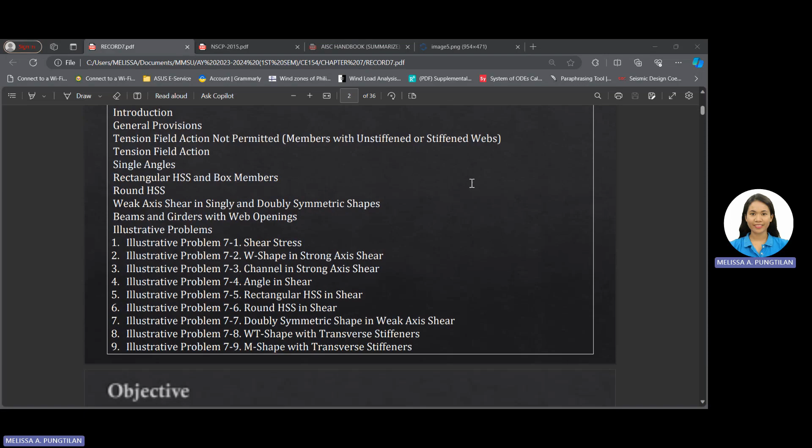So the outline of our topic for today, let's start with the introduction. Here we will be refreshing our knowledge on shear stresses and shear forces, applying what we learned during Mechanics 104 to this chapter. Then we have the general provisions, specifically Section 507 of the NSCP, which is solely for the design of members for shear. We'll also discuss tension field action, what are the meanings of stiffened and unstiffened webs, and then single angles, rectangular HSS, and so on. As we go through our examples, we'll learn what these terms mean and their applications. We also have 9 examples, but unlike our previous topics on compression and flexure, these examples are not too long.

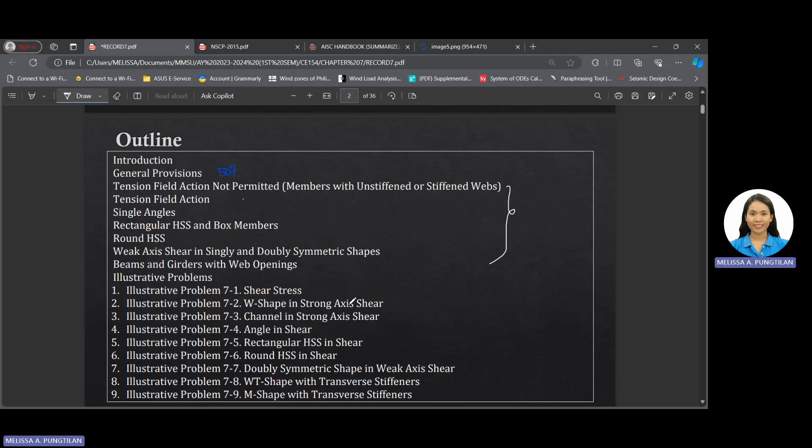So our objective for today: you will be able to identify the shear forces and shear stresses imposed on structural members. This will be mostly a review since we already covered this during Mechanics 104. We will also identify the difference between the strong and weak axis, differentiate doubly and singly symmetric shapes, design and analyze structural members for shear, and calculate the shear strength of different structural shapes. Okay, so let's start.

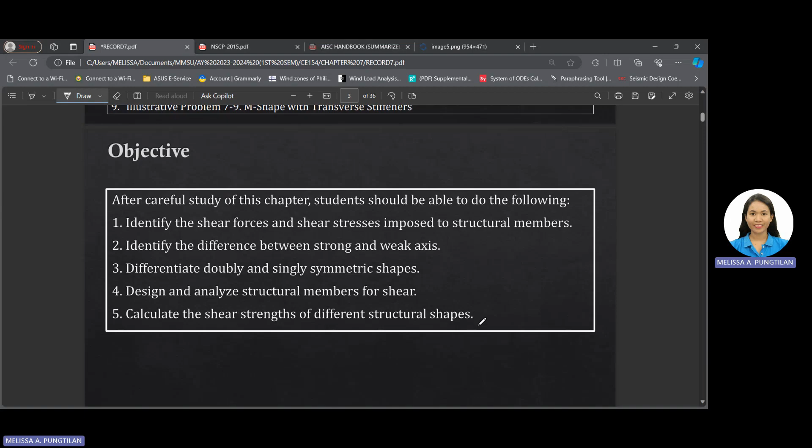This section addresses webs of singly or doubly symmetric members subject to shear in the plane of the web, single angles and HSS subject to shear, and shear in the weak direction of singly or doubly symmetric shapes. These are the different scenarios we'll encounter in our examples. We will focus on the webs for I-beams, for doubly and singly symmetric members, and for single angles and HSS, our approach will be different. All of this follows the provisions specified in Section 507 of our NSCP, which gives us our guiding principles and specifications, just like the other topics.

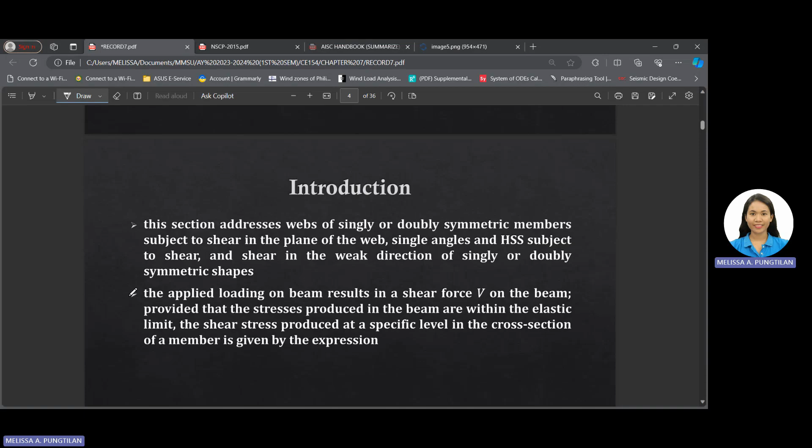The applied loading on a beam results in a shear force V on the beam, provided that the stresses produced in the beam are within the elastic limit. The shear stress produced at a specific level in the cross-section of a member is given by an expression to be discussed later. As you may recall from Mechanics 104, we computed the shear forces of a specific structural element. There are two ways to get the shear force: the most common is by drawing the shear diagram, and the other way is by using the method of sections.

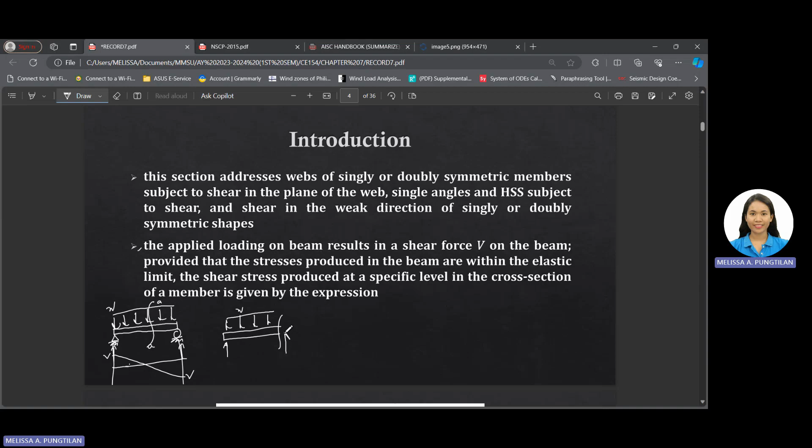For example, here we have a simply supported beam loaded with a uniformly distributed load. What we do is get the reactions, then draw the shear diagram to get the shearing forces at a specific area or location. Or we can use the method of sections: when we cut a beam, we have the reaction and the load intensity, and when we cut, we can see the shear force at that point, which we can compute. This is usually denoted as V, our shear force. So the shear force V depends on the applied load.

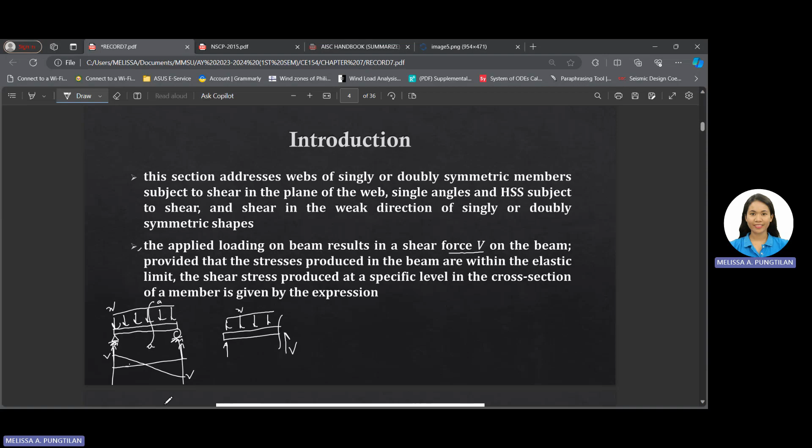Our shear stress can be computed by this formula, where the shearing stress FV is equal to VQ over IB. This was already introduced during Mechanics 104, where V is the shearing force, Q is the statical moment of area, divided by the moment of inertia of the section, multiplied by the width. So this is our general formula for shearing stress: FV equals VQ over IB. What we do here is first identify the shearing force, so how do we compute the shear force?

Of course, by having the shear diagram or the method of section.

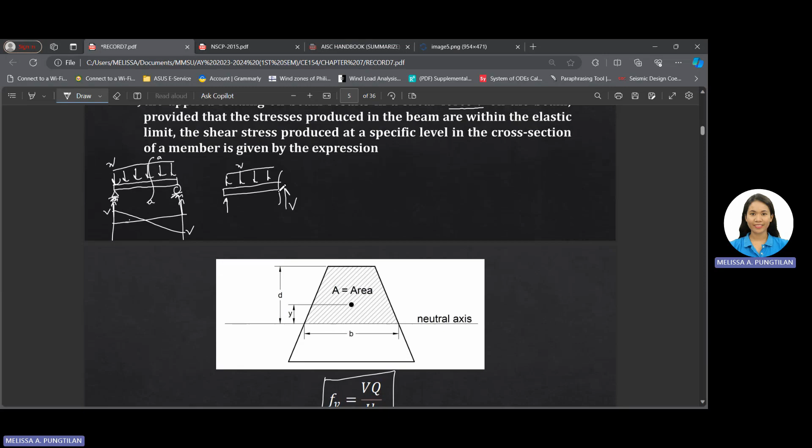Next, our Q, the statical moment of area, is just Q equals A multiplied by the distance. For example, this is our section, this is the neutral axis, already located. What we are getting here is we identify a specific area, let's say the area above the neutral axis. So we determine the area multiplied by Y. That Y is just the distance of the centroid of the shaded area going to the neutral axis. That's why we have our formula for statical moment of area multiplied by Y, where Y is the distance from the centroid of the shaded area to the neutral axis.

Then D, distance of the topmost fiber from the neutral axis, distance of the centroid of the shaded area from the neutral axis, moment of inertia, and the width of the section at the level considered. So again, this is the general formula for the shearing stress. And if you're still familiar, we also have one for rectangular sections: 3 all over 2 multiplied by the shear force divided by area. This formula is derived from VQ over IB, but this one is for rectangular sections only. So let's go back to our formula, VQ over IB. Where did that come from? It came from the concept on which...

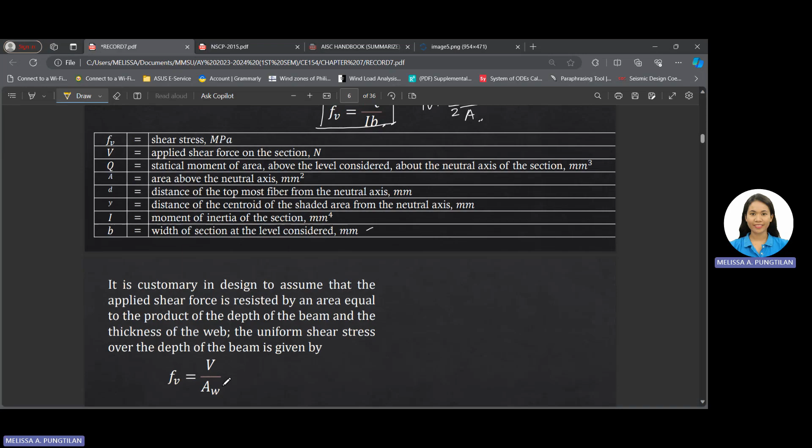V divided by the area of the web. Itong formula na to. So, FV is equal to V all over the area of the web.

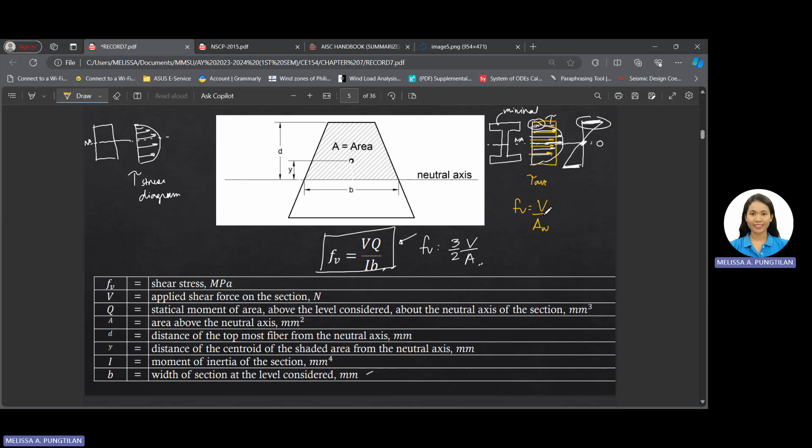Okay. But here, ang i-consider natin na area of the web is the depth multiplied by the thickness of the web. So, ibig sabihin natin sa depth, ito yun. Ito yung i-consider natin, depth. Tapos, yung thickness of the web.

Okay. Ma'am, area of the web lang naman yung i-consider. Bakit natin i-consider yung overall depth? Bakit kailangan pa natin i-consider yung flange? Ang sabi dito, area of the web. Because we are on the average. Shearing average yung kinukuha natin dito. So, kailangan pa rin natin i-consider kung ano man yung meron dito sa flange. Kung ano yung stress na nandito sa flange.

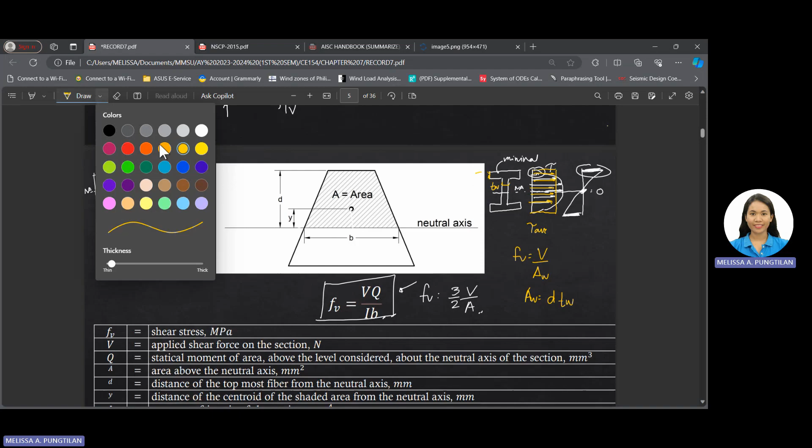Kaya imbis na H, di ba H yung ginagamit natin dito sa web. Pag meron tayong saan na yan? Diba, if we are talking about the web, ang kino-consider natin dyan is the H, or sa AISC natin, it is the T. Pero dito, ang i-consider natin is the depth of the whole section, because we are talking about the average.

Okay? We are talking about the average. Even if small lang stress nandito sa flange, i-consider pa rin natin kasi nga, we are talking about the average. Therefore, in having the average shear stress, we will be using V all over the area of the web, on which the area of the web is equal to the depth of the section multiplied by the thickness of the web. Okay?

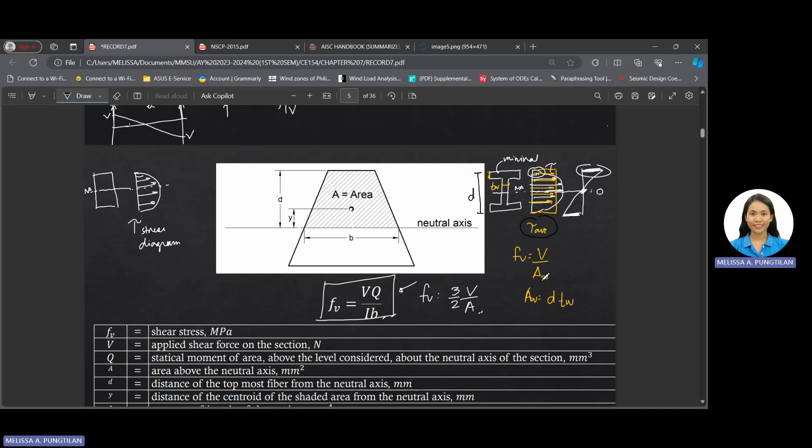Yan. So, dito nanggaling yung ating formula for the shear stress.

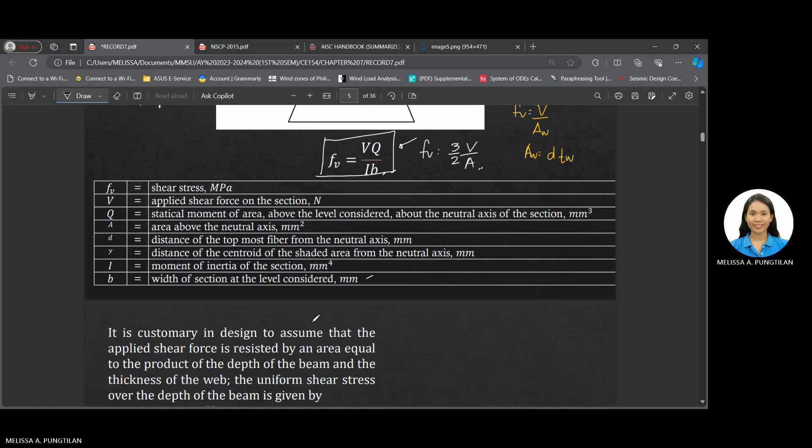So later on, makaka-encounter tayo ng mga terminologies just like transverse stiffeners, tension field action, pero di-discuss natin yan mamaya. Okay? That's why meron akong mga illustration dito.

Okay, so puntahan naman natin ngayon yung, bago tayo mag-proceed sa examples natin, let's open our NSCP and proceed to section 507 for the provisions and specifications for the design of members for shear. Okay?

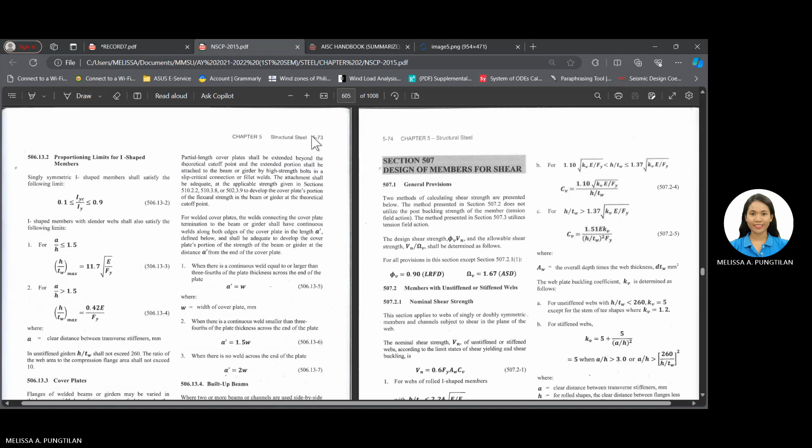So, discuss lang natin saglit. So, for our general provisions, two methods of calculating shear strength are presented below. The method presented in section 507.2 does not utilize the post-buckling strength of the member or the tension field action, while the method presented in 507.3 utilizes what we call the tension field action.

So the design shear strength, okay, is equal to phi v Vn, and the allowable shear strength is equal to Vn divided by the omega V. So ito yung gagamitin natin for the LRFD, the design shear strength, phi v Vn, and then sa ASD, we will be using Vn divided by the omega, on which yung ating phi, again, is equal to 0.9, and then the omega is, or the safety factor is equal to 1.67 for ASD. Okay?

So, dalawa yung magiging computations natin dito, or dalawa yung sections natin dito sa 507. We have the members with unstiffened or stiffened webs, and then for 507.3, dito naman natin makikita yung tinatawag nating tension field action. Okay, so ano yung tinatawag natin na unstiffened and stiffened elements, and then yung transverse stiffeners tsaka tension field action. Okay, so we have here a I-beam.

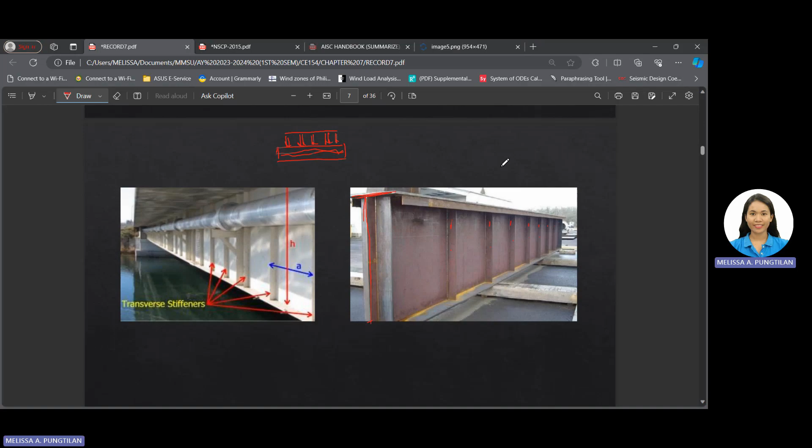So the tension field that we call, let's get a drawing here. This is our I-beam, side view. Let me sketch this example. So this is the flange, then this is the stiffener. Okay, stiffener, then the flange. Of course, here is the web, right? Web. Then the stiffener, then flange.

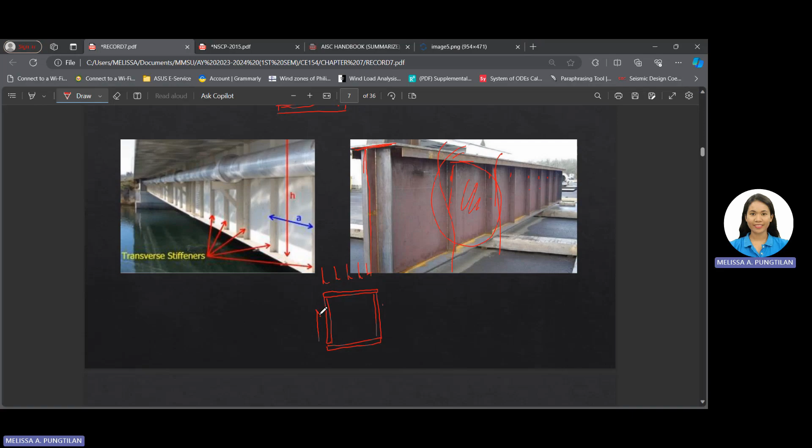So when we apply a loading, right? We apply a loading. So what resists it? A certain shearing force, right? Shearing force. Of course, it has a partner, right? So if that's upward, of course we have a shearing force downward to create a sliding effect. Then there's a complementary part here.

So that's the action or distribution of our shearing forces if we have a stiffener then flange. So what happens here is we get a resultant force in this part, which we call tension. There will be tension there, then here we get compression. So there is compression and then tension on each side of our section. So what happens to the web if a stiffener is provided?

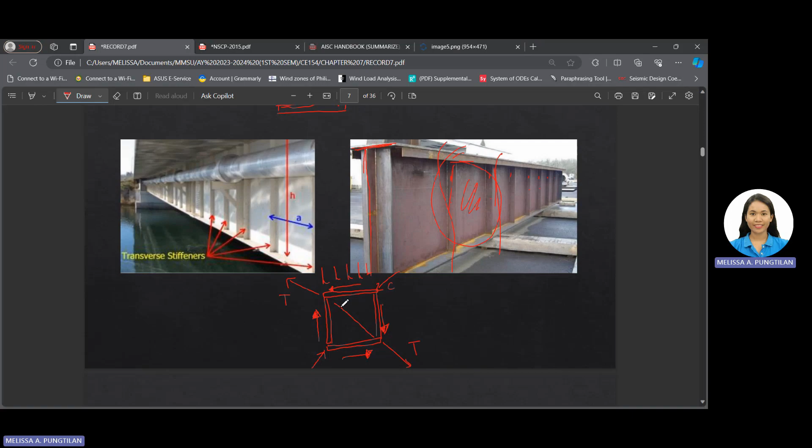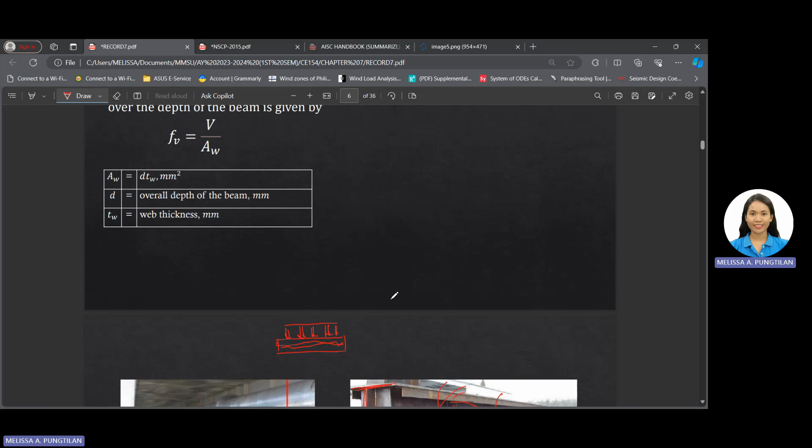So we get what we call panel shear. This is now called panel shear, if we provide a stiffener to our webs. So the tension field action that we call occurs here. There's tension on the panel shear. So the tension field action looks like this. It happens in our web if we provide what we call transverse stiffeners.

These are our stiffeners, and this is the web. So this is the section I drew earlier. So what was done here? This is a testing of material. They applied a load on top. They placed a load. Then, through the use of stiffeners, they developed what is called tension field action. So again, the tension field action happens in our web if we provide transverse stiffeners. So our shear stress is redistributed here in what we call panel shear. This is panel shear, so that's tension field action.

And again, the tension field action only happens if our web has stiffeners on all four sides. So this is our web, right? It has stiffeners. What are its stiffeners? The plate stiffeners we installed, then the flange. The flange also serves as a stiffener for our web. So tension field action only occurs if the web is stiffened on its four parts or sides. This is our web, stiffened with transverse stiffeners, and of course on top the flange, and also at the bottom, flange. So that's what we call tension field action.

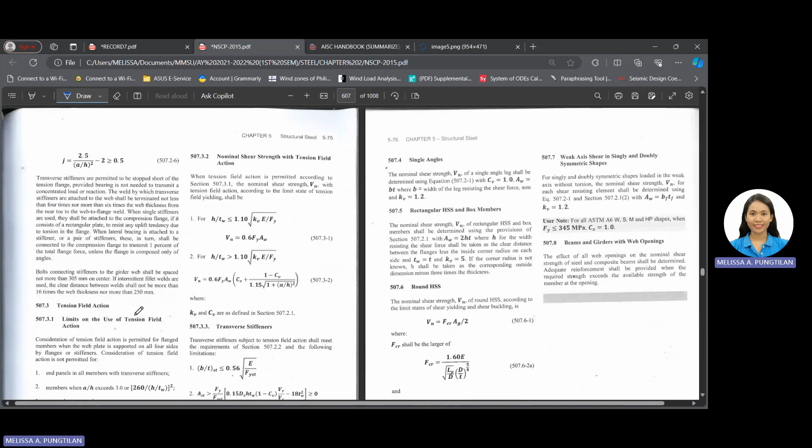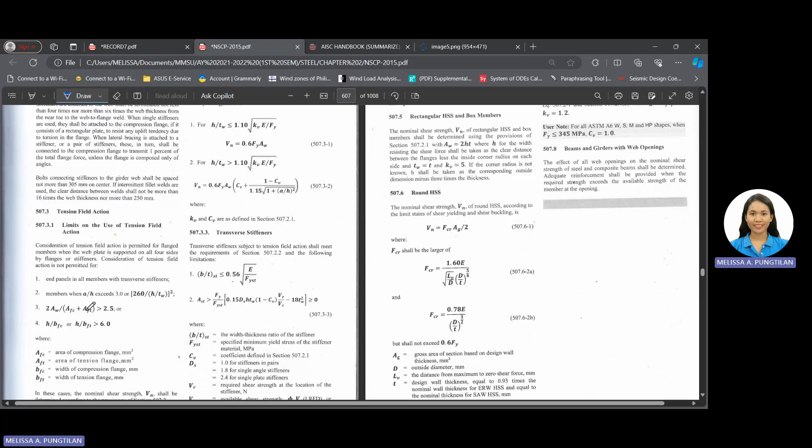So again, in our NSCP, there are two scenarios. The first method presented in Section 507.2 does not utilize the post-buckling strength of the member, or the tension field action. And the second utilizes the tension field action. So that means in this first part, our transverse stiffeners don't require tension field action. Here, we place stiffeners to provide tension field action for our member. So later on, we'll discuss each one through our examples.

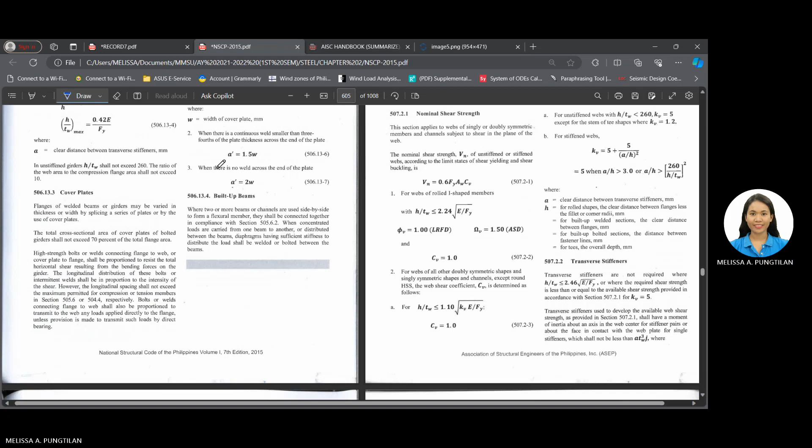Okay, let's go back to the examples. Let's proceed to example number 1.

A W410 by 132 beam with a yield stress of 345 megapascal is simply supported over a span of 6.5 meter. The beam supports a uniformly distributed load of 90 kN per meter that includes the self-weight of the beam. The beam is laterally braced at the supports and at the third points of the span. Determine the maximum shear stress and the average shear stress in the beam.

Okay, so what we need to find in this problem is the maximum shear stress, yung FV natin, and then the average shear stress in the beam. So let's label it FV max.

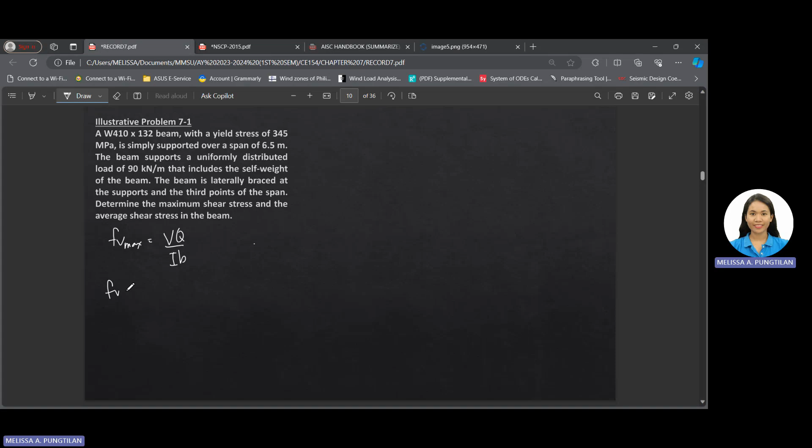FV max, we will be using the formula VQ all over IB. And then yung FV average, the average shear stress, is the V all over the area of the web.

Or V all over A, area of the web, where the area of the web is equal to the depth multiplied by the thickness of the web. So that's what we need to get.

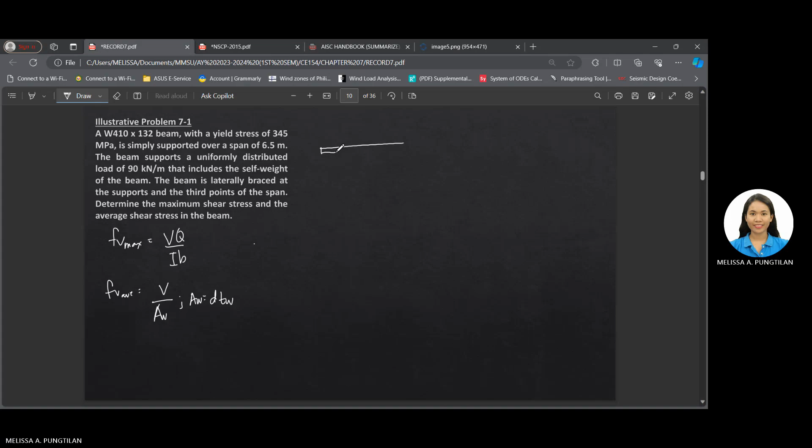So let's illustrate the problem. We have a W410 by 132 beam that supports 90 kilonewton per meter, including the self-weight, simply supported, and the loading is a uniformly distributed load of 90 kilonewton per meter.

Tapos we have a length of 6.5 meters. The beam is laterally braced at the supports and at the third points of the span. So we divide it by three, third points. So these are where the bracing of our beam is located. So we need to define or determine the maximum shearing stress and then the average shearing stress.

Okay, so what we'll do first, if you want to draw the shear diagram, there's no problem, para makita mo talaga yung location ng maximum shear. But take note of this one, guys.

The maximum shear of a beam usually occurs at the support. Tandaan niyo yan - the maximum shear force, not shear stress. The maximum shear force or Vmax natin usually occurs at the support. Therefore, kung ano yung reaction dito, ganun din yung magiging Vmax natin.

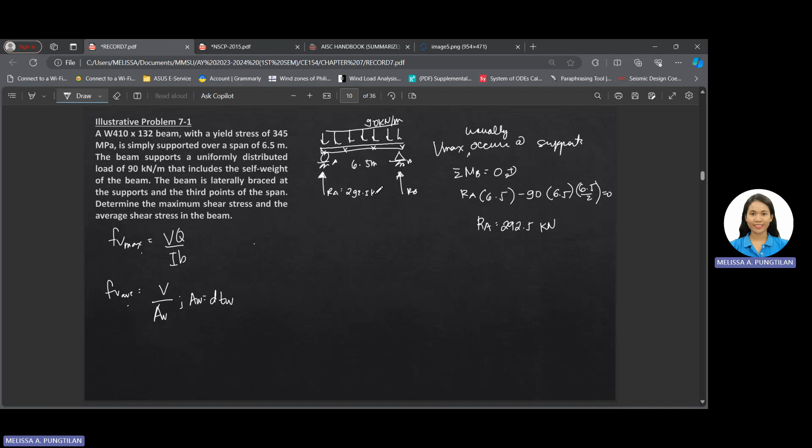292.5 kilonewton. Since this is simply supported and uniformly distributed load, RA is just equal to RB, so 292.5. So if you want to get the shear diagram, there's no problem.

So what we'll do is, 292.5, is there any force? Yes, vertical. Is there any area at the load diagram? Yes, we have 90 multiplied by 6.5, which is equal to 585. So 292.5 minus the area, that's why we have negative 292.5, then vertical, so 292.5. So that's the shear diagram you get.

So as we can see on the shear diagram, the Vmax occurs at the support. So tama, the Vmax occurs at the support. So our Vmax here, the V we will use, is equal to 292.5 kilonewton.

So let's draw the I-beam, since I-beam is the given section. Okay na tayo, we already have the value of V, which is 292.5.

So let's proceed to Q. So the Q is the statical moment area. Okay, this is the neutral axis.

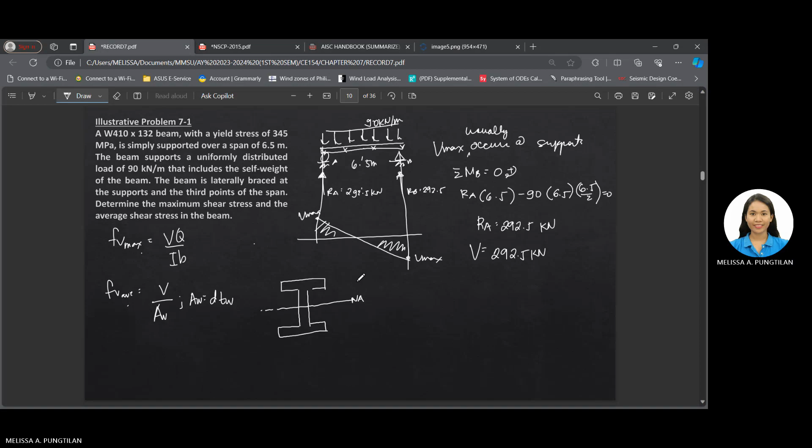So what we'll get there is the half of this section, yung W410 by 132. So if we cut that in half, it becomes WT 205 by 66. Okay, so that becomes a T section. Why do we get the T section, or the half of the W410 by 132?

Kasi yung Q natin, di ba, the formula is equal to A multiplied by Y. So the Q we'll get is this - this is the area being referred to. And then the Y is the distance of the centroid, the distance of the centroid of the shaded area going to the neutral axis. That's what we're looking for. We have no problem with the area.

Because the area is presented here, there's a specific area for our WT 205 by 66. And the area of this one, by looking at your AISC, the area of WT 205 by 66 is equal to 8450 square millimeter. Okay, so that's its area.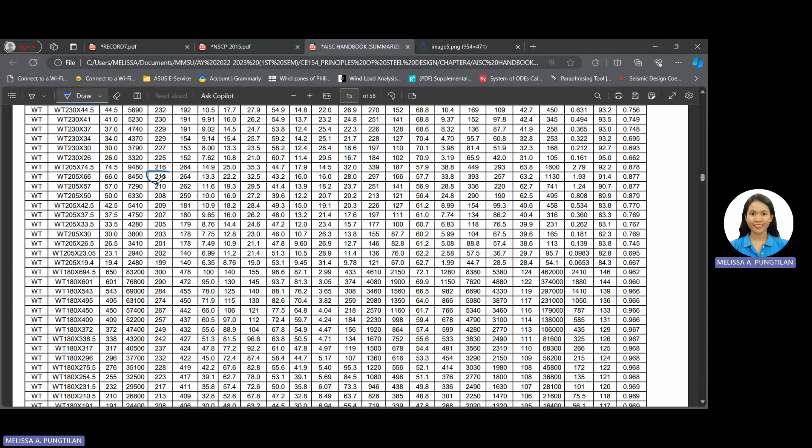200, ilan kanina? 213, WT 205 by 66. Yan. So, the depth is equal to 213. This is 213 millimeter.

Okay, so yung Y natin is 213 minus yung Y bar. That is 43.2. Ito yung Y bar, Y bar is equal to 43.2. Therefore, Q is equal to 8,450 multiplied by 213 minus 43.2. So we have 1434,810 square or cubic millimeter.

Okay, so okay na tayo sa Q. So meron na tayong V, meron ng Q. Next, what is I? So the moment of inertia is the moment of inertia of the section, of course.

So the moment of inertia of our section is equal to, okay, so balik na tayo dun sa whole section, wag na sa WT. Yung WT, ang kailangan lang natin sa kanya is yung distance of the centroid. After nun, balik na tayo sa original section. So yung I na gagamitin natin dito is the I or the moment of inertia of the whole section. So, Ix of 410 by 132, no?

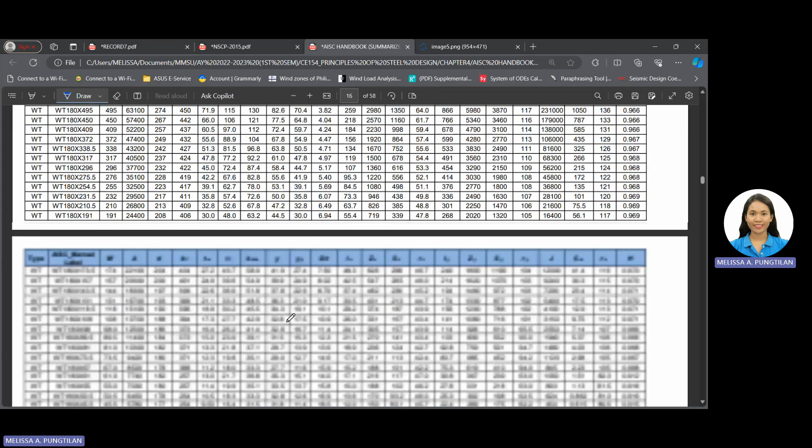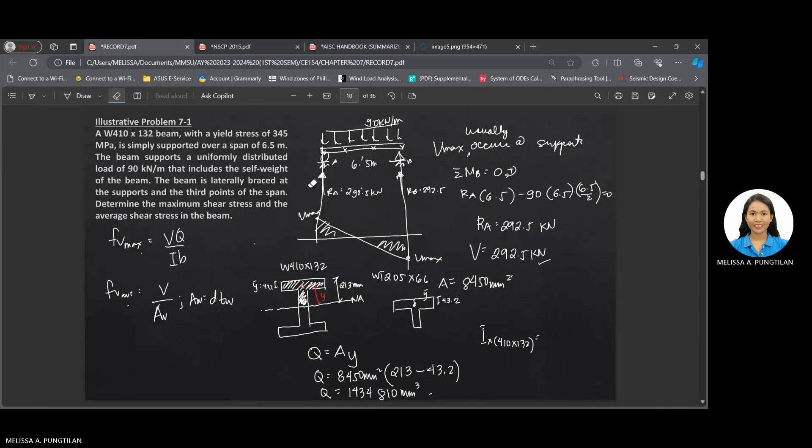Okay? So, based on the AISC, the I, or the moment of inertia of W410 by 132 is equal to, yung I natin, kailangan natin ng W410 by 132. So, ito yan. So, we have 541 times 10 raised to 6 millimeter raised to 4. Tama ba? Ulit, 541. Yes, 541.

Okay. And then yung B natin dito is just the thickness of the web. Wag kayong malilito dito. We are always considering kasi yung web kasi dito nag-occur yung majority of the shear stresses dun sa web natin. So ang i-consider nyo na B here is the thickness of the web. Hindi ito, kasi dito sa flange, minimal lang naman yung shear stress dyan, di ba, sa flange. So, ang i-consider natin dito is the thickness of the web.

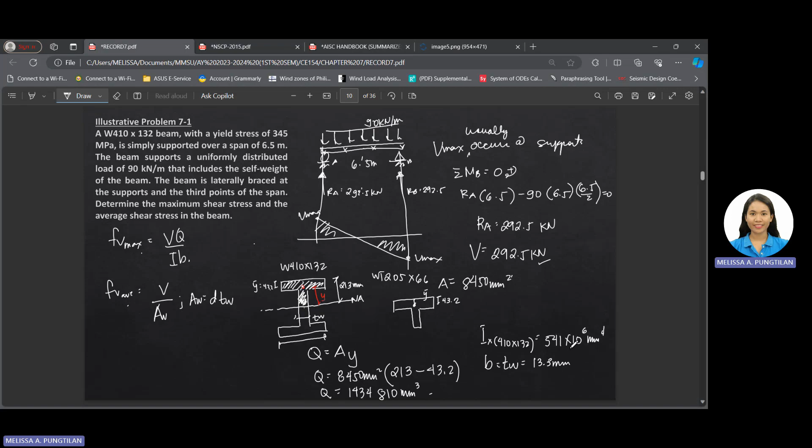So, B is equal to thickness of the web. And that is equal to, according to AISC, the thickness of the web is equal to 13.3 millimeters. So, we have 13.3 millimeters. Okay, so kompleto na yung mga missing natin, makakailanganin natin in computing for the shear maximum IB.

So substitute na natin. So our V is equal to 292.5, nakakilonewton yan. So, pwede nating i-express into Newton muna para later on maging Newton per square millimeter yung sagot natin. So, times 10 raised to 3 Newton. What is Q? We have 1434,810 cubic millimeter divided by the moment of inertia 541 times 10 raised to 6 millimeter raised to 4 multiplied by the thickness of the web, we have 13.3 millimeters. Okay, so cancel. So our unit is now Newton per square millimeter.

Okay, therefore the FV max is equal to, so we have 58.33 Newton per square millimeter or 58.33 megapascal. Okay? So ito na ngayon yung FV max or the maximum shearing stress in the beam.

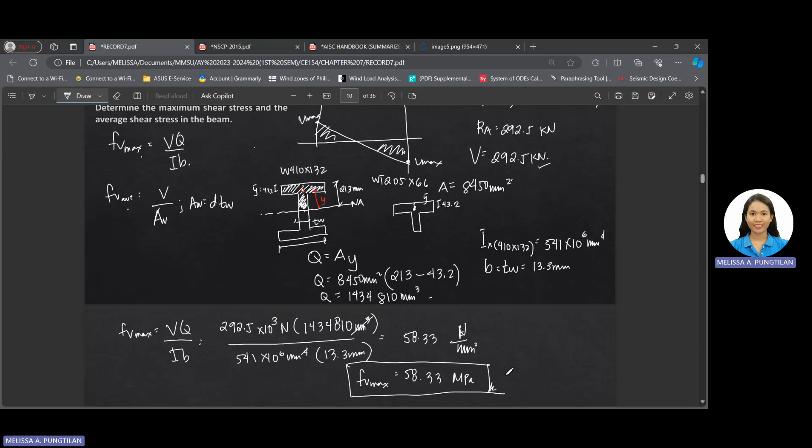And then next, for the average shearing stress, let's say FV average. So we have V all over AW. So V natin is 292.5 times 10 raised to 3 Newton. Area of the web is just the depth multiplied by the thickness of the web.

So the depth for 410 by 132, depth is equal to, ito ba yung depth? Yes, is equal to 427. So 427 millimeters. Tapos the thickness of the web is equal to 13.3 millimeter. Okay. Therefore, we have 51.5 Newton per square millimeter or 51.5 megapascal. So, ito naman yung magiging sagot natin for the average shearing stress.

So, yan yung example 1 natin.